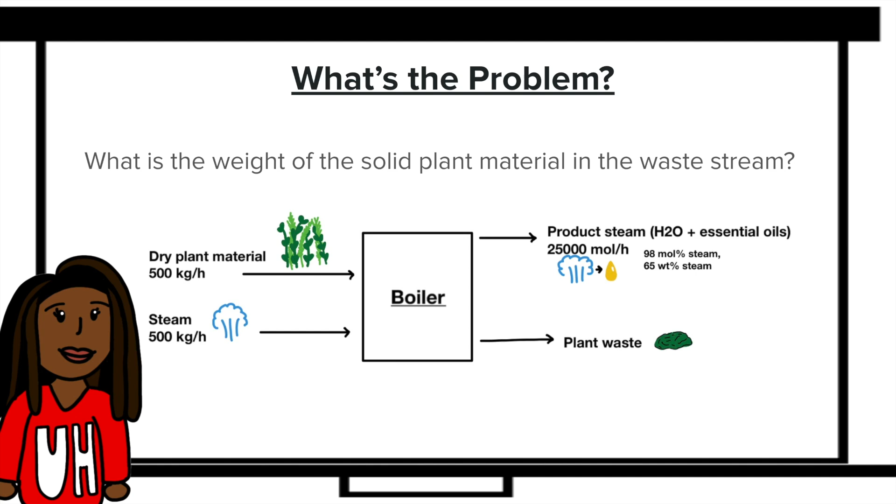So first we have to look at the steam distillation process and figure out what exactly we're trying to find out. After observations, we discovered that we need to calculate the weight of solid plant material in the waste stream after 500 kilograms per hour of dry plant material and 500 kilograms per hour of steam are placed in the boiler. Next, we needed to figure out what we do know about the steam distillation process in order to get ourselves organized and have a better understanding of our problem.

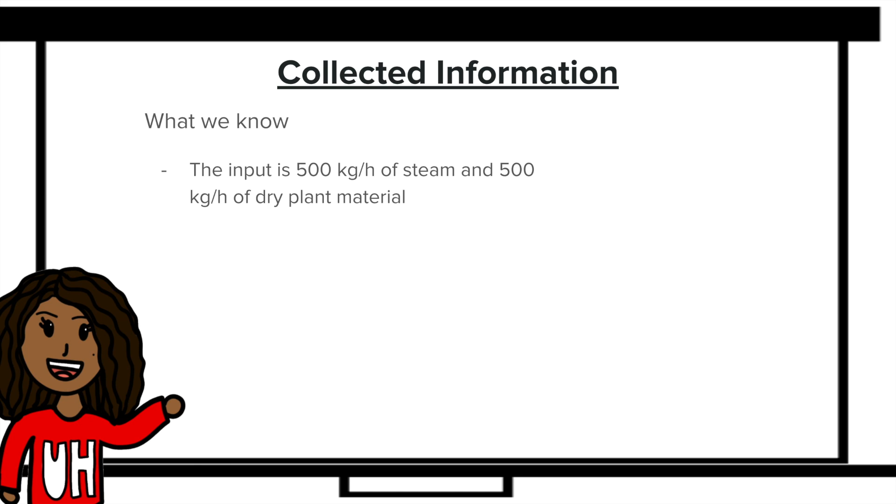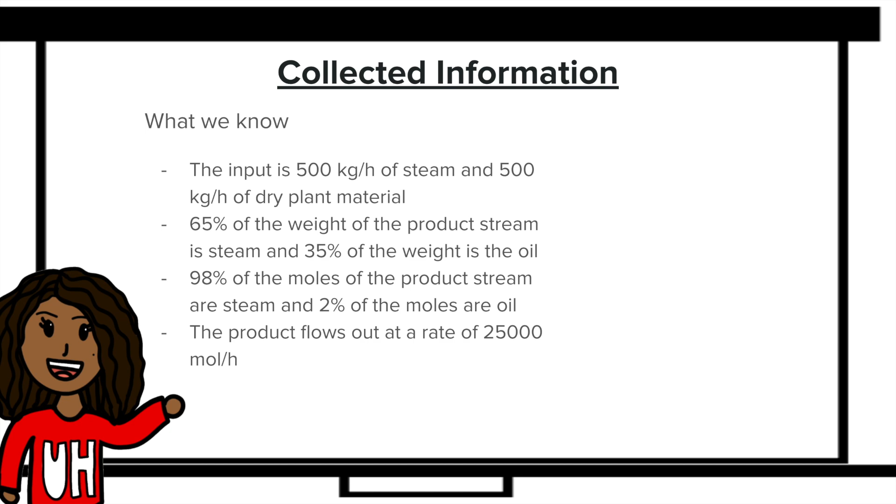What we do know is that the input is 500 kg per hour of steam and 500 kg per hour of dry plant material. 65% of the weight of the product stream is steam and 35% of the weight is oil. 98% of the moles of the product stream are steam and 2% of the moles are oil. The product flows out at a rate of 25,000 moles per hour, and the molecular weight of water is 0.018 kg per mole. We assume that the product stream acts as desired, there's no reaction, it's a steady state. Any excess product is added to the waste stream and include excess oil as solid plant material.

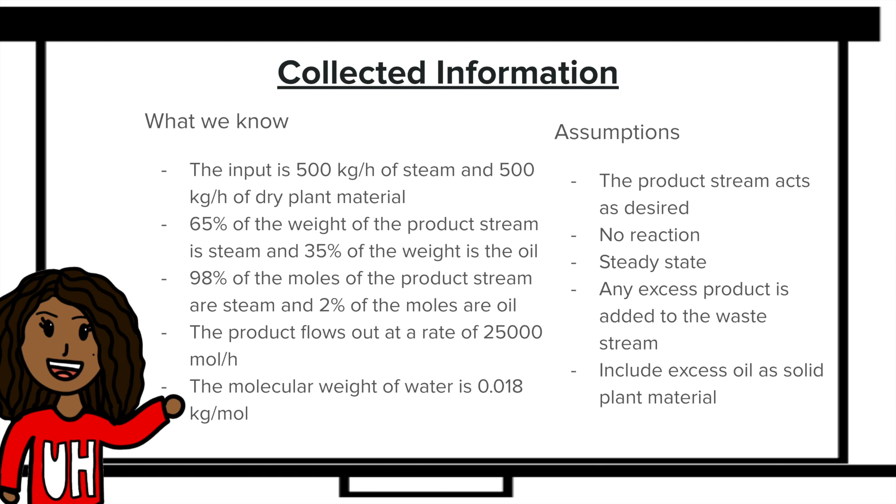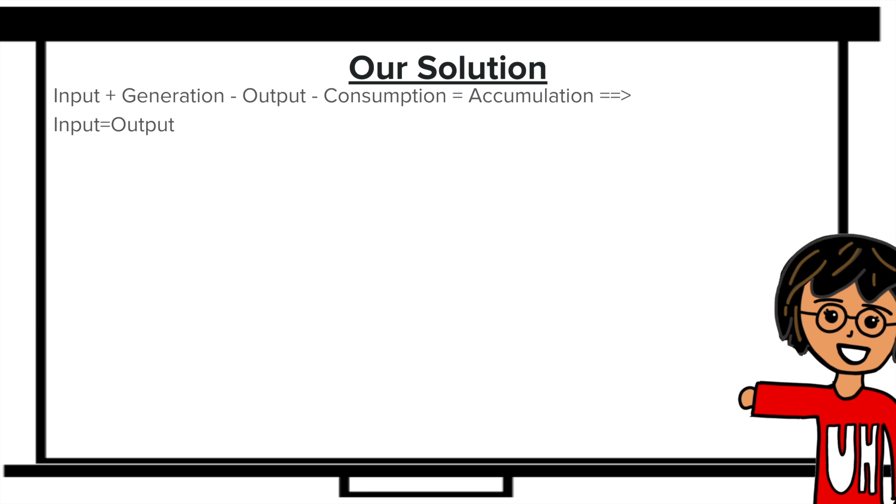After finding all of that information, we can then find a solution. Using the general balance equation, we know that input plus generation minus output minus consumption equals accumulation. And from our assumptions, since we know that it's a steady state and that there's no reaction going on, generation, consumption, and accumulation are all equal to zero. When we rearrange the formula, that means that input equals output. We also know about the certain ratios that should happen in the product stream.

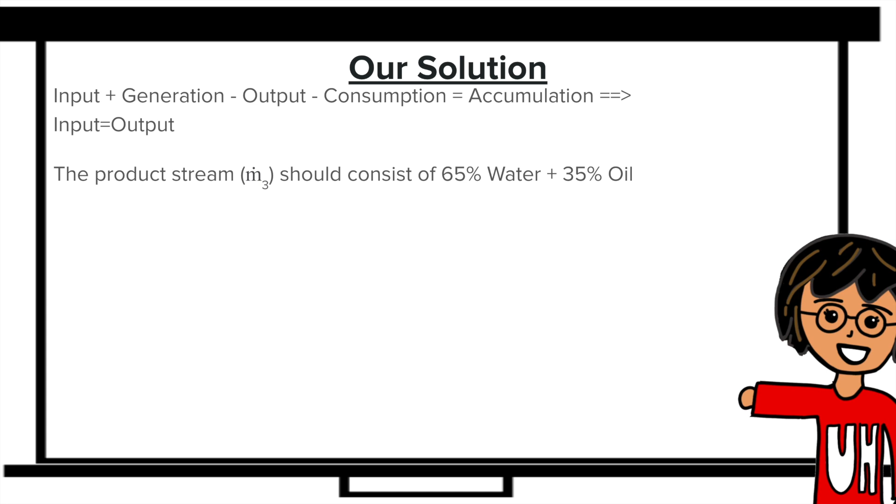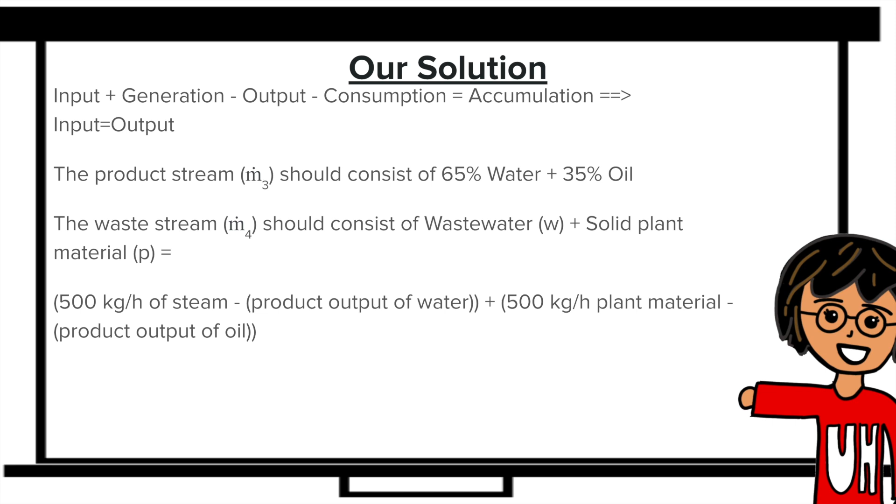The product stream, which we'll call M3, should consist of 65% water and 35% oil by weight. The waste stream, which we can call M4, should consist of wastewater, the variable W, plus solid plant material P. The waste stream should also equal the input of 500 kilograms per hour of steam minus the product output of water, plus the 500 kilograms per hour of plant material minus the product output of oil. Using all these formulas, we can solve for P to get the weight of the solid plant material waste.

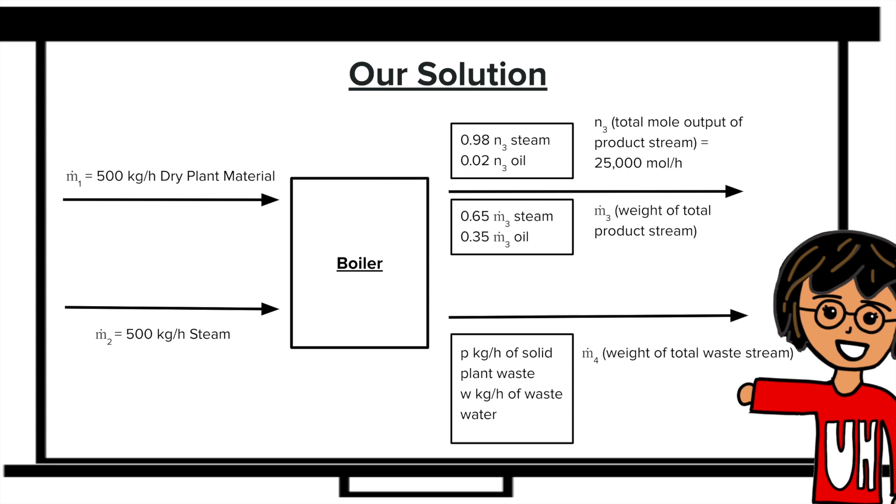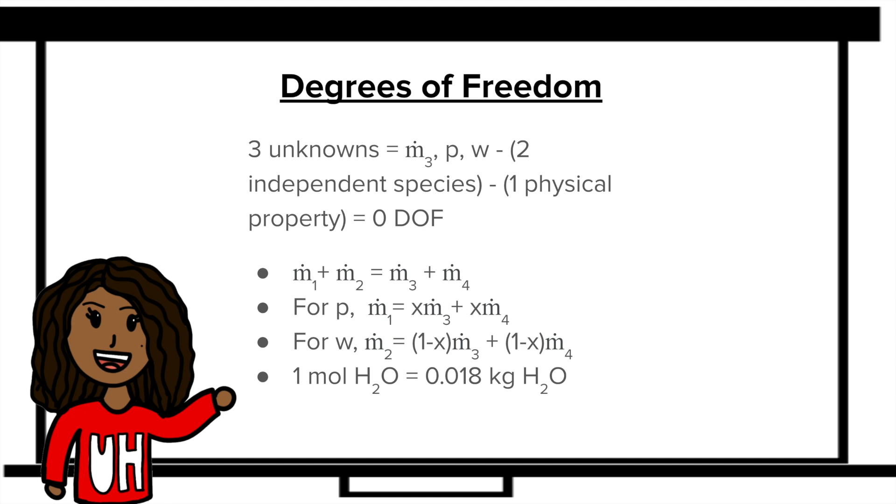For the degrees of freedom, we have three unknowns: m3, which is the weight of total product stream, p, which is plant waste, and w, which is water waste. To find 0 degrees of freedom, you would take m3, p, and w minus 2 independent species minus 1 physical property. The equations are m1 plus m2 equals m3 plus m4. To find p, m1 equals x m3 plus x m4. To find w, m2 equals (1 minus x) m3 plus (1 minus x) m4. And finally, 1 mole of water equals 0.018 kg of water.

And with all of that taken care of, we can go on to refinement and implementation, and finally calculate how much solid plant material there is left in the waste stream. So first, we know N, which is the product stream coming out in moles per hour, which is 25,000 moles per hour. 98% of this is water, and 2% of this is oil. As you can see here, we can multiply 0.98 times N to get each of the components of the product stream.

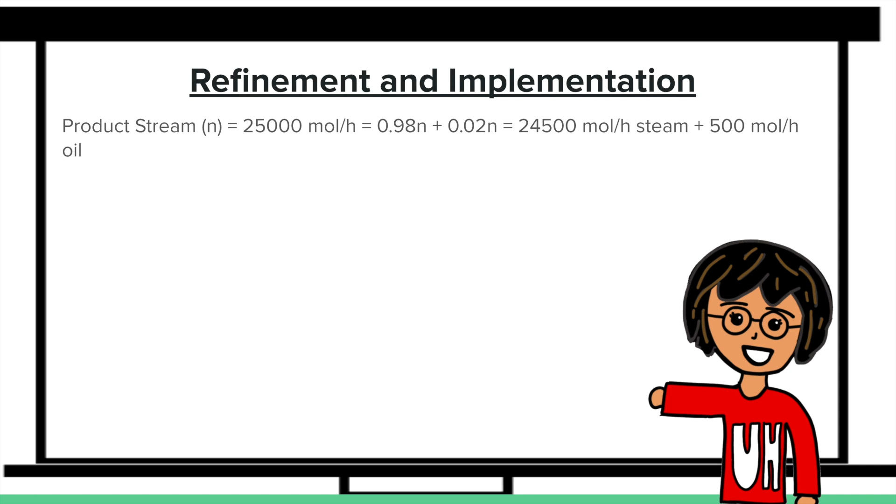After that, we can figure out the weight of the produced water, knowing the mole conversion of water, which would be 24,500 moles per hour of steam times 0.018 kilograms per mole, which leaves us with 441 kilograms per hour of water. This is also equal to 0.65 m3 because 65% of the weight of the product stream is water. Using this, we can figure out the weight of the entire product stream, which is 678.5 kilograms per hour. We can also find the weight of the oil in the product stream by subtracting the weight of water from the total weight of the product stream, which gives us 237.5 kilograms per hour of oil.

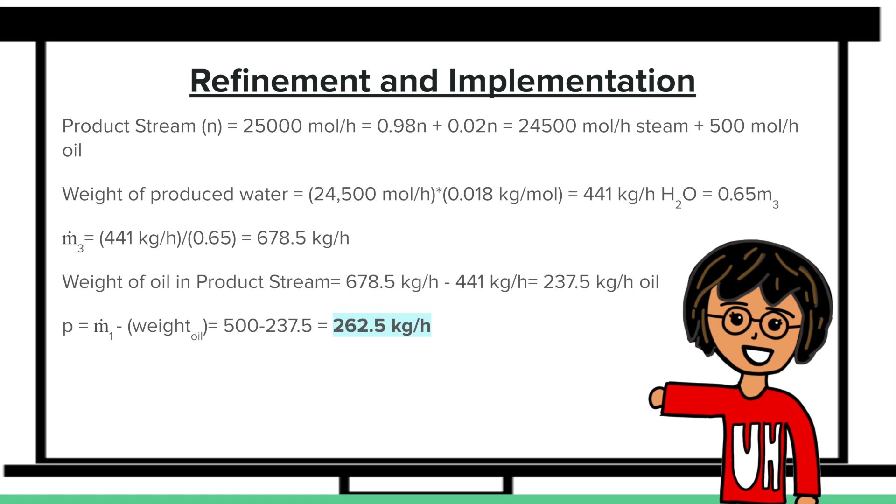Now we know that the plant material is equal to the input of the dry plant material minus the weight of the oil. That means that the leftover plant material is 500 minus 237.5, which leaves us with a total waste of 262.5 kilograms per hour of solid plant material. So finally, we need to verify and test. And to make sure our numbers were correct, we verified our results using our Excel spreadsheet.

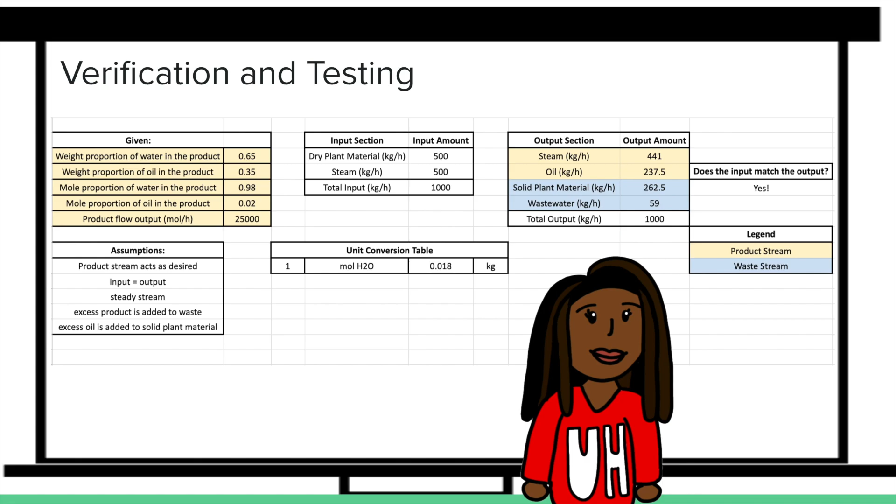Wow. Thank you so much for this. We had no idea that we were creating that much waste every time we made our products. Thanks to you, now we can address this issue and think of possible ways in which we can limit our waste. For example, we could alter our processes or even recycle the waste for use in other projects.

Hopefully, by taking this step, our company can become an example for others, reminding us all of the importance of knowing just as much about the waste we produce as the product itself. After all, if it weren't for our environment, Essentially Only and so many other brands wouldn't be here today, so it's up to us to try and protect it for future generations.